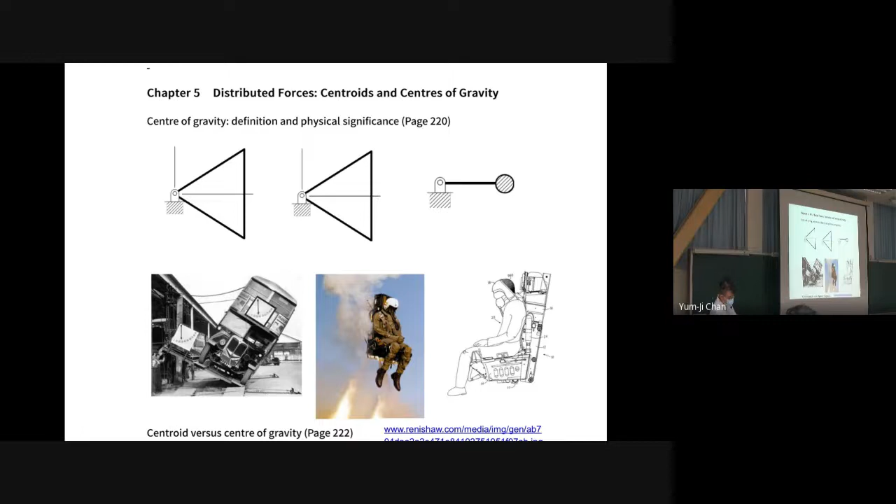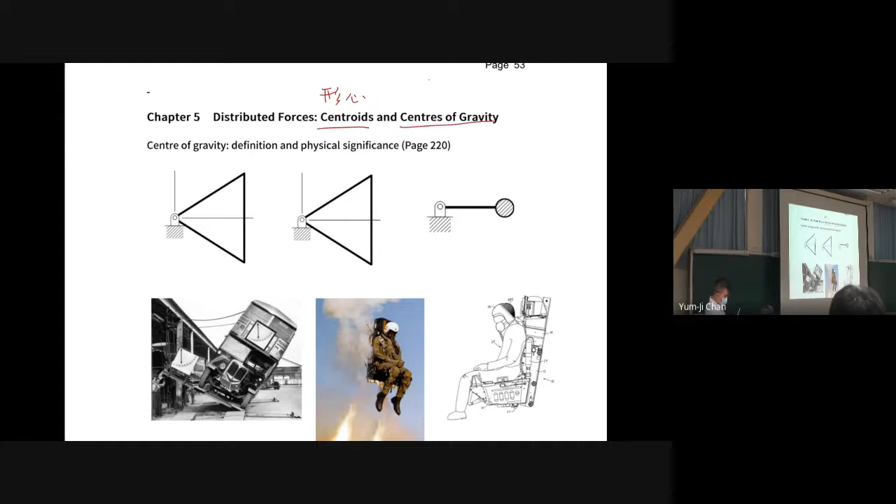So page 53. Okay, now page 53. Now let's talk about, let me explain some words. Centroid is this one, and center of gravity is this one. I think you have learned center of gravity in your high school physics.

Now, the difference between the two is like this. Centroid, we are talking about geometry. And for center of gravity, we are talking about force, or sorry, or mass.

And there is a small difference between these two words. Centroid is talking about geometry, the center of something according to geometry. And for center of gravity, we are talking about center of something. We are talking about mass or force. Okay.

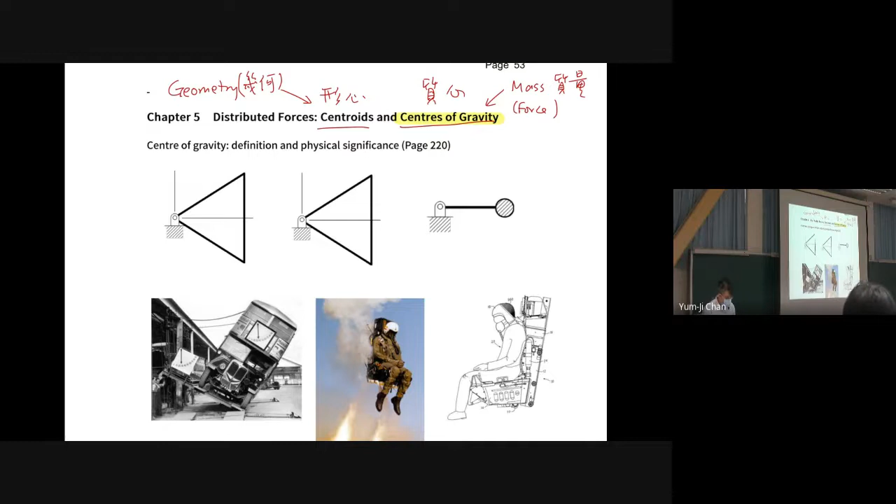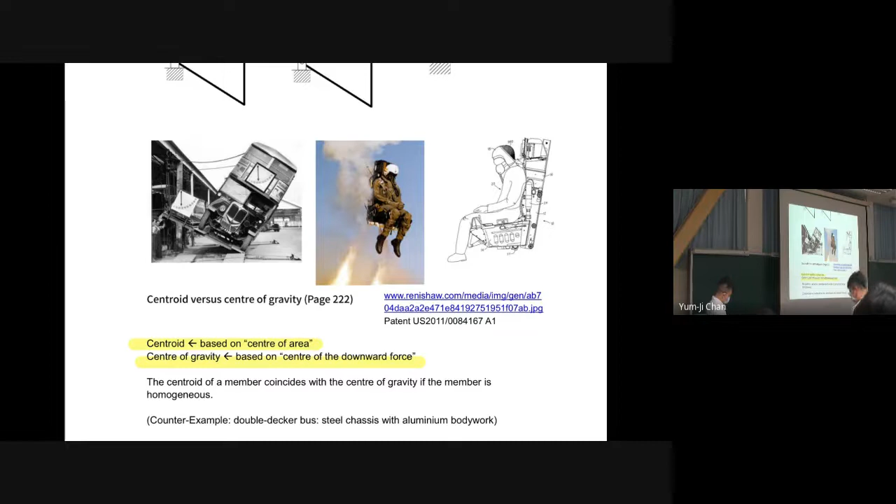So let me go through all the words I want to cover, and then I will go to the mathematics. Now, this one, I think I typed this here, so you can read this. Okay. Now, let me have two examples here. The left one you can see in Hong Kong and in London, and this is called a double-decker bus, and I think in Taipei we have this as well.

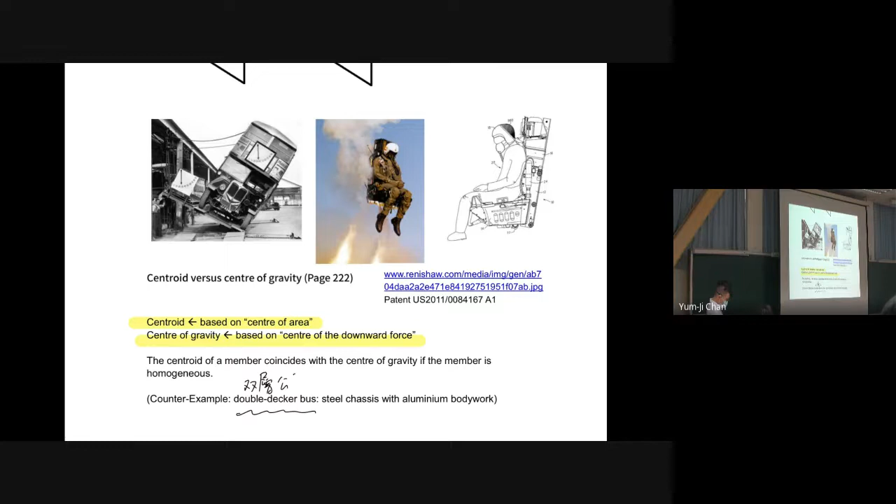For this kind of buses, if we go down like this, of course we know the Chinese, but in English we would say the bus topples.

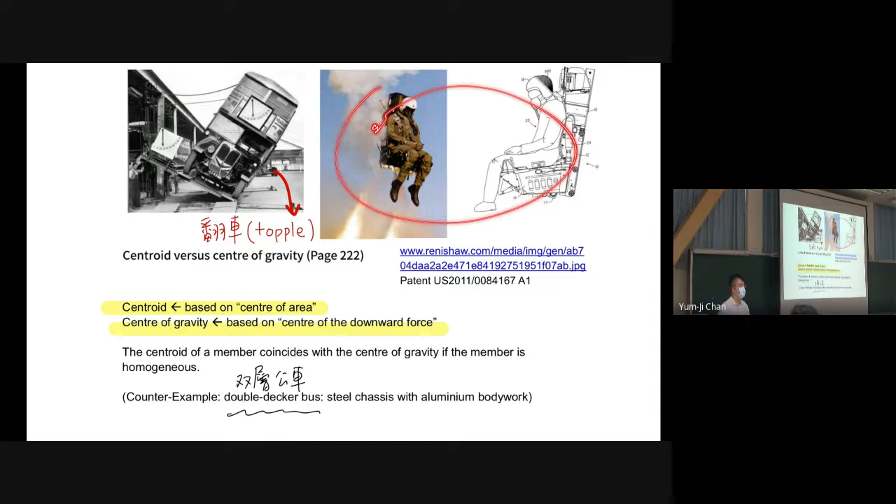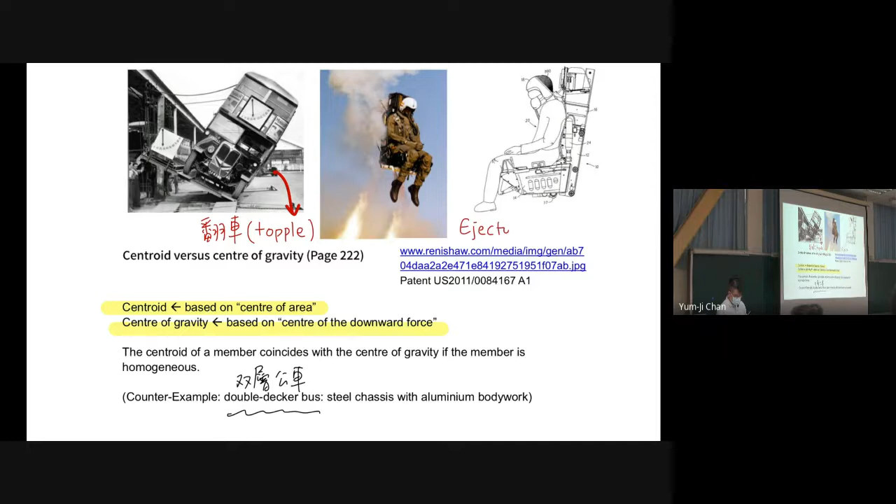And what's the thing on the right? Where will you see it? It is an ejector seat. Right. Now which one should we talk about first? Okay, the left.

So for a double-decker bus, the laws in Hong Kong and London say that this platform should go to 28 degrees, and the bus will not topple and remain stable.

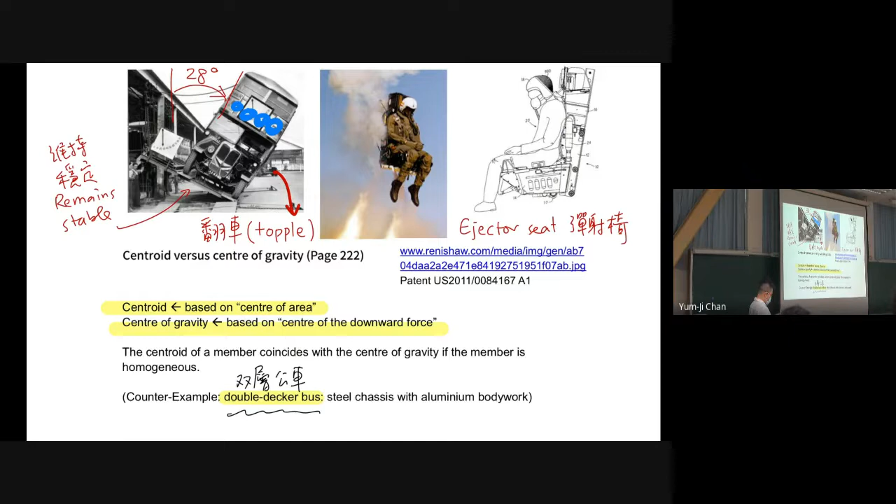And at the same time, it is not empty, and it has masses here, the weight of passengers. So it is not easy to design the double-decker bus, because when it is under test, we put the weight of passengers here, and then we tilt it by 28 degrees, and it remains stable.

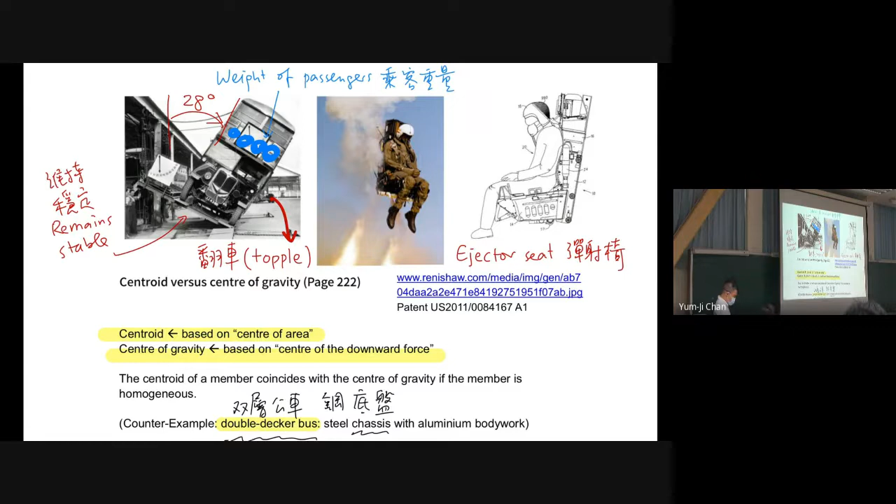So actually, for this kind of buses, the base or chassis is usually made of steel, and its bodywork is made of aluminum. Okay. So let me talk about all the words here.

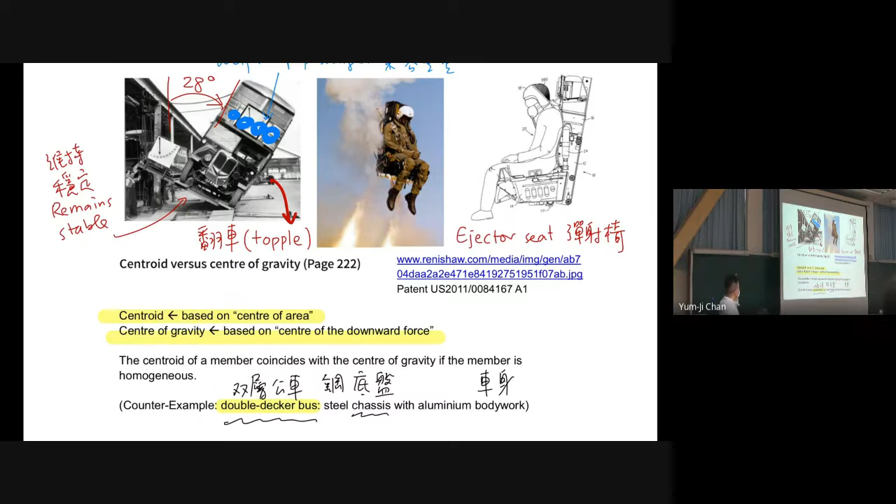So it has to go through 28 degrees, but it's still stable. And at the same time, the weight of passengers is put here, and it needs to be stable. It cannot topple at this angle. Okay.

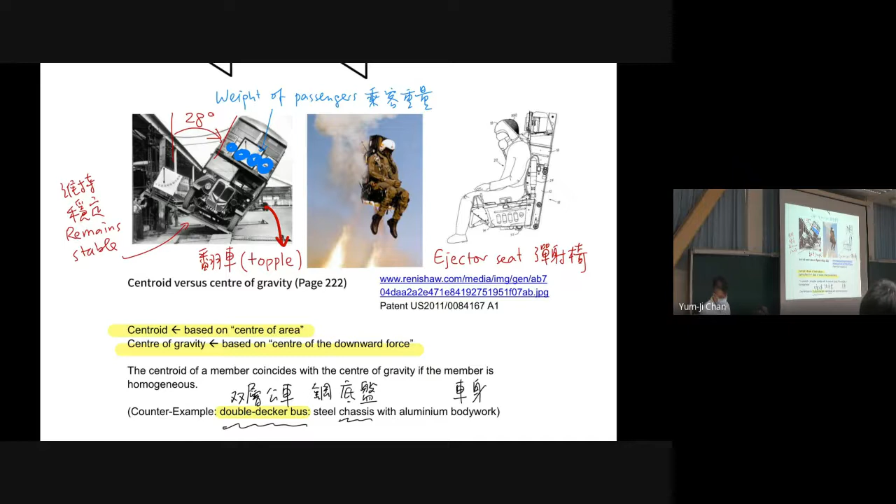So usually buses are designed with a steel chassis, and you can use this word for cars as well. The base of any car is called a chassis, and the body is made of aluminum. Okay, usually it's like this. Now, any problem with this? If not, then we go to the one on the right, the ejector seat, and you can see it on fighter jets, right?

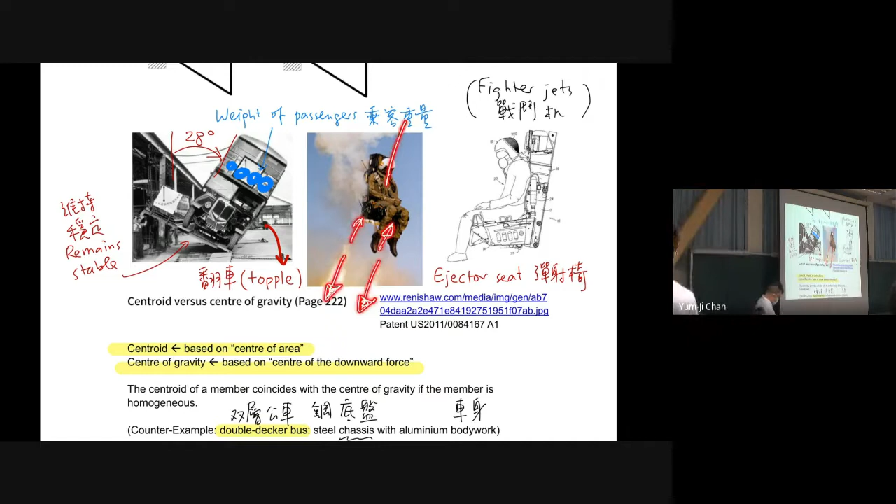Now, we have ejector seats on the fighter jets, and let's think about this. Of course, you can see there are rockets going this way, and then the person goes this way, right? Now, if we have the action of the rockets here, then we have the reaction to the person here, and then it will go up, right? So let's think about it.

For example, the center of gravity of a person is, say, maybe here. I would say this one is called C.G., center of gravity. You have the center of gravity of the pilot there.

Suppose we have these two rockets, with the force pushing the chair like this. What will happen? We have a force couple system. If we have a force going here, it means a force here and a couple here, right? So the pilot would go round and round and round, and it is not very good, right? So it will have moments here.